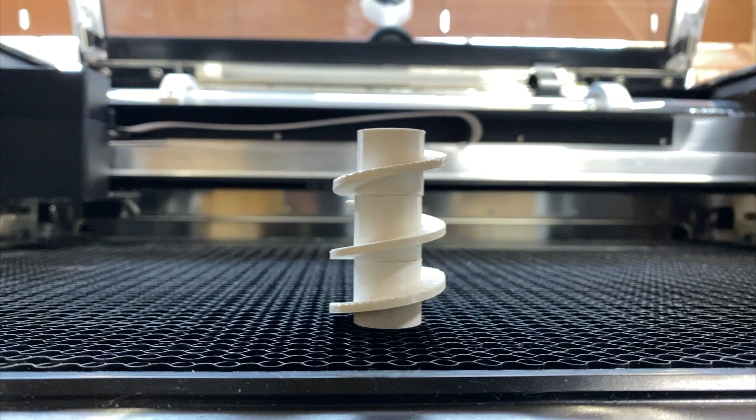If you own a Glowforge, you know two things. You know that it's one of the best tools you can have in your shop, and there's not a really handy way to hold small pieces of material down onto the crumb tray so that the air assist doesn't blow them around or they don't get jostled and the laser loses its focus.

Some people have developed some really good pins and other little tie-down mechanisms, but they all share a few similar faults. One, they don't hold material of any size. Two, they often break. And three, they don't hold them very tight. You can't really get a slight warp out of a piece of 1/8 inch birch.

So here are some of the things that I really want to make sure my new material holder does. First, it will need to work with materials of all sizes. That means all the way down to a piece of paper and all the way up to a 1/2 inch. And it should hold them firmly.

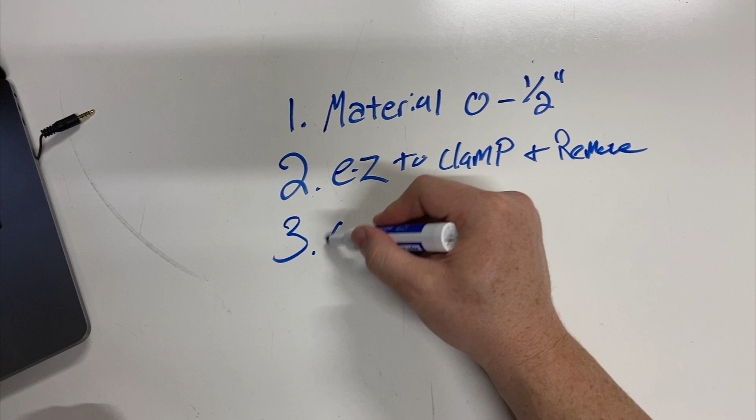It needs to clamp easily and be removed easily. Some of the T-pins don't really come out as easy as they go in, and it needs to be very easy to pull off as well as to clamp down. It can't get in the way of the cut, so it should have a really minimal holding profile. It shouldn't really extend onto the workpiece very much. It should just stay right at the edge and hold it down tightly.

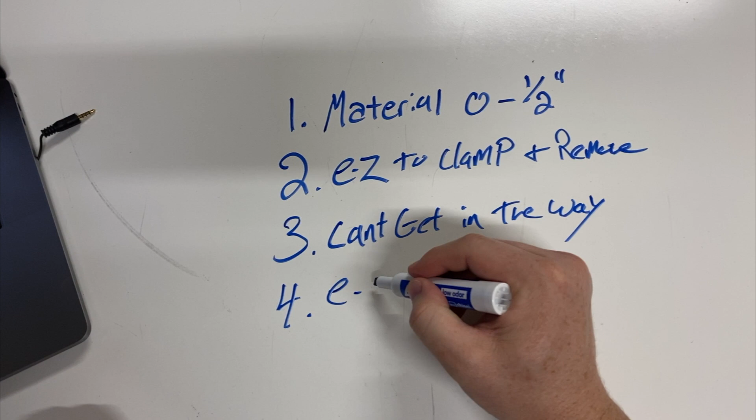And it should store easily right by my Glowforge. I don't want to be looking for it. I need it to be easy to reach and to apply to the workpiece. So with those few things in mind, let's jump to the computer.

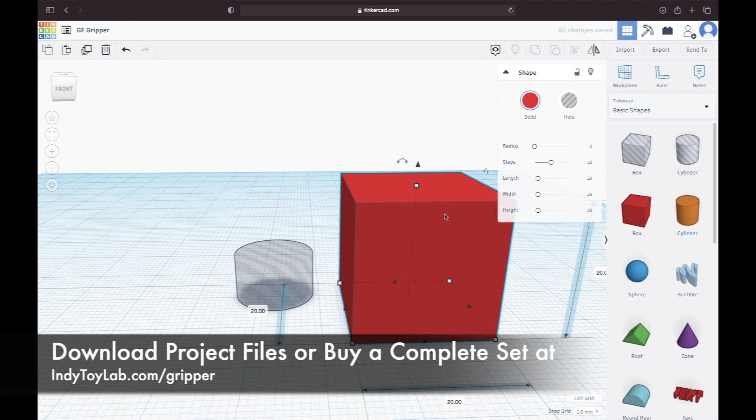Let's start with what we know. And we know that we want this to be magnetic. So let's get the size of our magnet in there. Let's start with something kind of square, a little bit bigger. We want to cut out different material sizes from each one of the faces, from 1/8 up to a 1/2 inch.

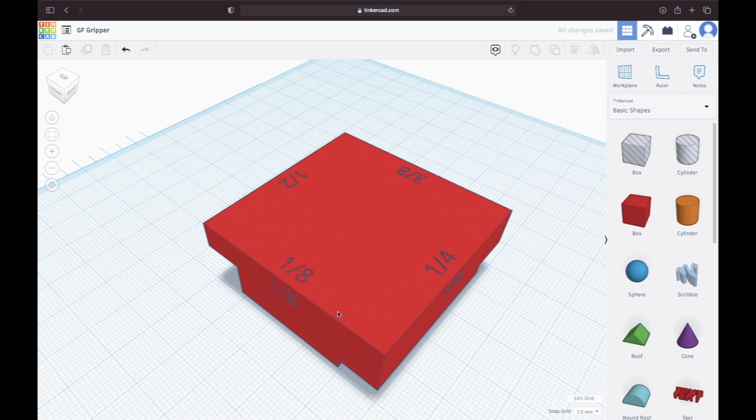Now you can start to see the profile. So we can put 1/8 under there, all the way up to a 1/2 inch over there. Let's add some labels really quickly. Also underneath, you'll notice our hole for our magnet. So now we've got that ready to go. Let's go ahead and throw this on the 3D printer and see how it works.

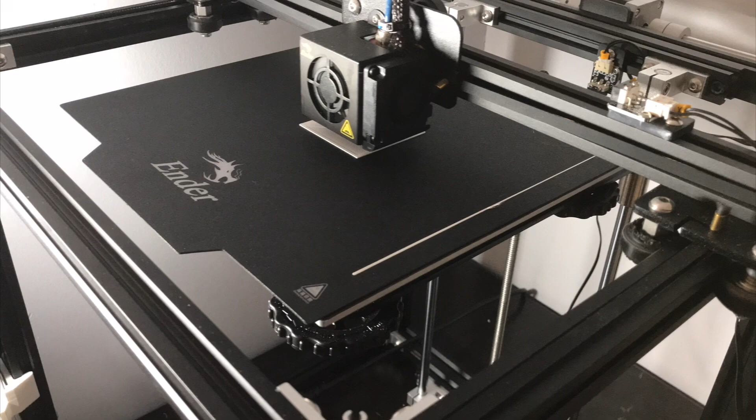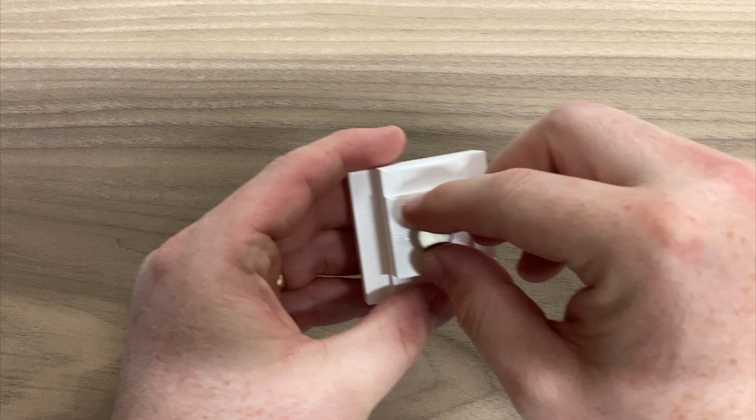Our finished print, and we're going to load the magnet. Now the magnets I'm using are these neodymium magnets, so stinking strong. Okay, there's a lot going on here. That's our magnet, and we will just seat our magnet down in there. We're going to let the epoxy dry and give it a test.

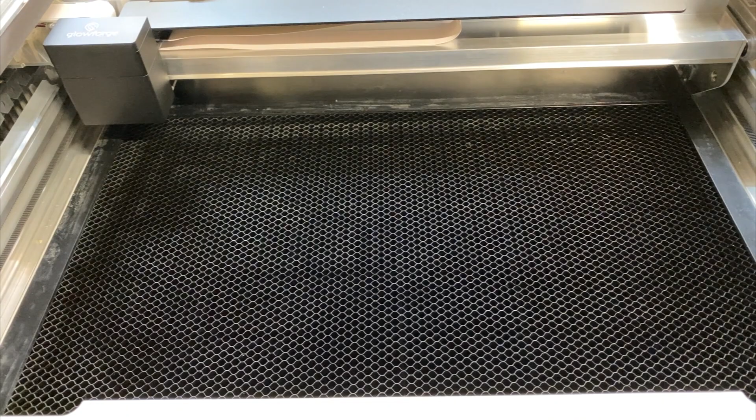So over to the Glowforge, where we've got a small piece of material we want to hold down. This is pretty consistent with the material I have the most trouble with because it's small, it's light, 1/8 inch white birch, and it tends to flutter a bit as the fan kicks on.

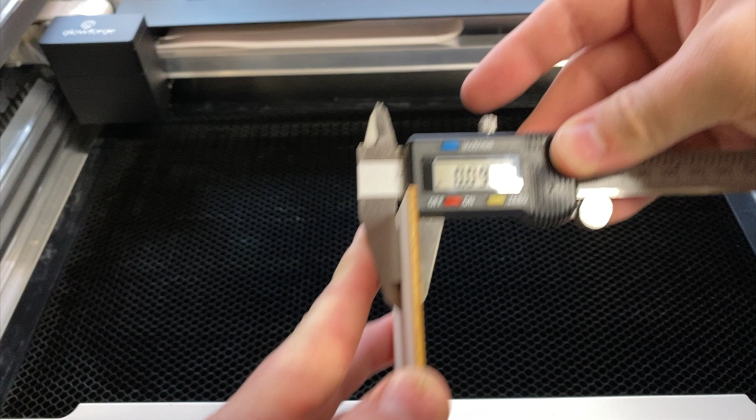One thing I noticed when I was getting ready is that this is probably going to be a problem we need to address in our next prototype, but you can see it's not 1/8 of an inch. But here we are with our 1/8 inch side loaded up. Let's go ahead and try it—you can see the magnet works really well, that's great. I can already tell you, it's just not a really positive grip. I can slide it in and out. I mean, I get some friction, right?

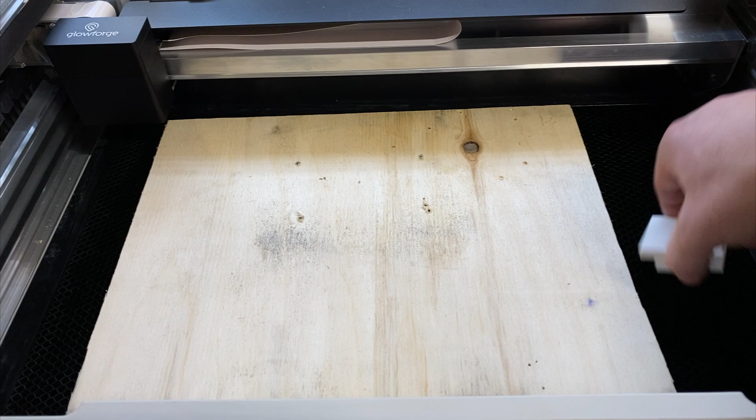But it's not what I want to do. Let me try something a little bit larger. I'm never going to cut on this, it's just scrap 1/2 inch ply. It looks pretty gross, but let's try to load up our 1/2 inch side there. Now that grabs okay, that's not bad. That's a true 1/2 inch, it was 0.49. But just generally, I feel like I wish I had more gradations. I wish I knew what I want to try. Okay, so we had a couple of problems with this one, so we'll just get rid of that.

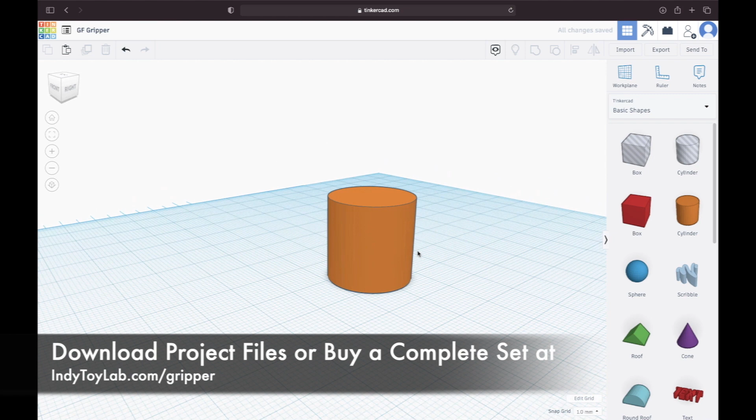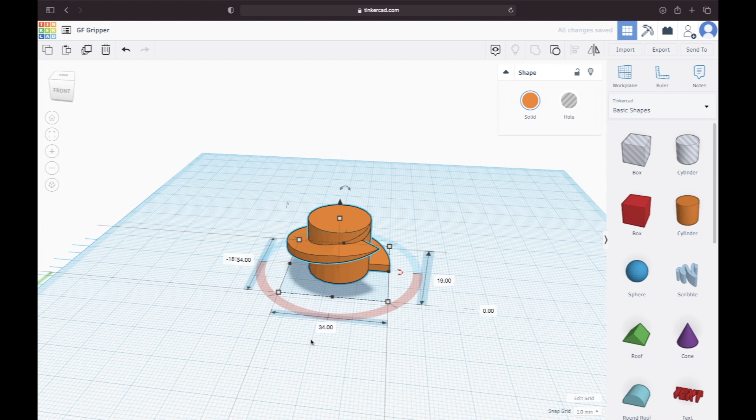And let's take our magnet, just throw on a cylinder. I'm wondering if I could take and wind something around the cylinder so it's continuously adjustable, so we don't run into that weird size material problem. The concept is you can put your material any size, from a piece of paper all the way up to a 1/2 inch, and just rotate it in place and snap lock that in with a little bit of pressure. I think this has a really good shot. Let's get it on the printer and see how it goes.

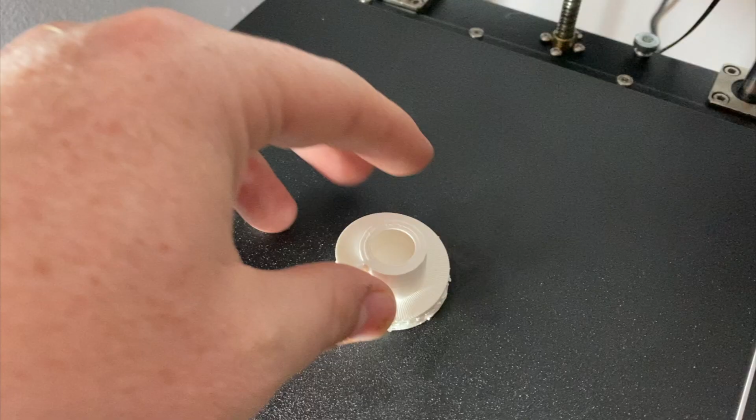I love this thing so much. I'm really excited to test it. Okay, back to install our magnet again. This is absolutely not a toy.

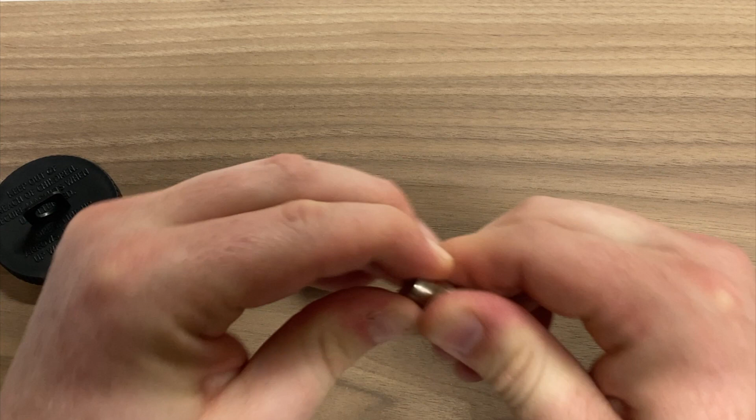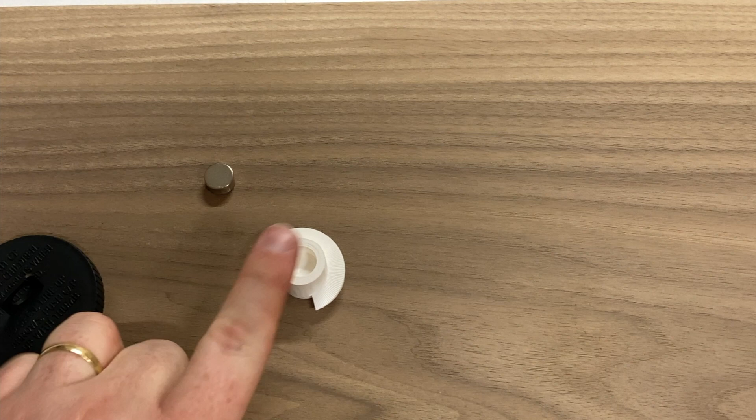Let me get these apart. I promise you I'm not faking this for the camera. How do you, seriously, how do you get these apart? Hold on, keep that far away from the other magnets. Come on, little buddy, nice. Down. All right, we're gonna leave that to dry.

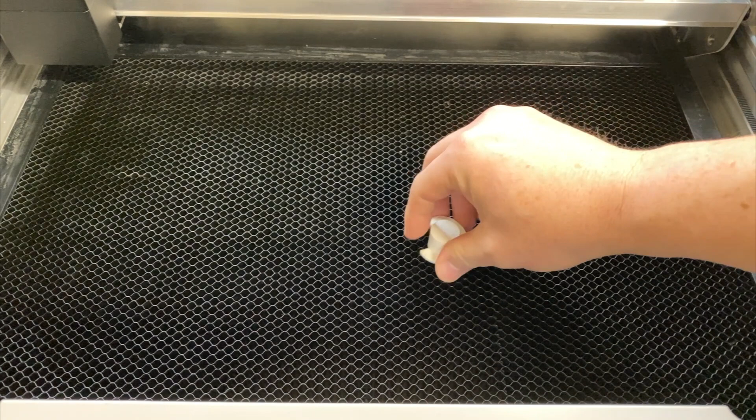We'll be right back. Back at the Glowforge to try our new prototype. So one of the things you'll notice is I put a bunch of these little V grooves on the bottom so that it kind of should ratchet into place, kind of twist and lock.

So let's try our same piece of white birch and just twist it. You can actually hear it kind of ratcheting in place. Let's see how it feels. Oh, that's really good.

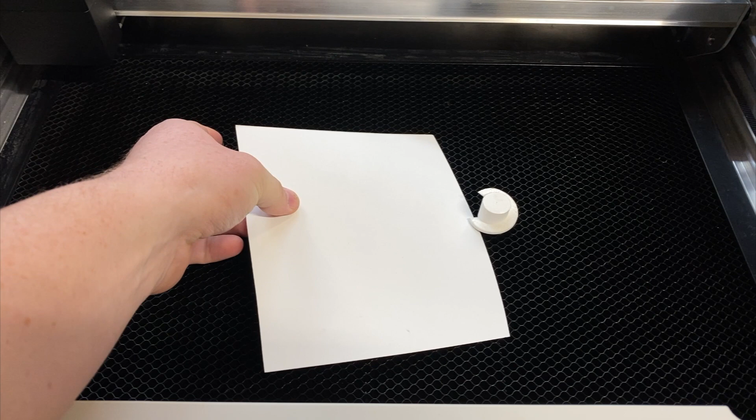Yeah, that's really good. What about a piece of paper? Just fit it all the way around on that one. Yeah, that's really good friction, actually. And honestly, you could just put it on the corner there too, and that's even better. So you got two options for paper. That's not bad. Let's try something a little thicker.

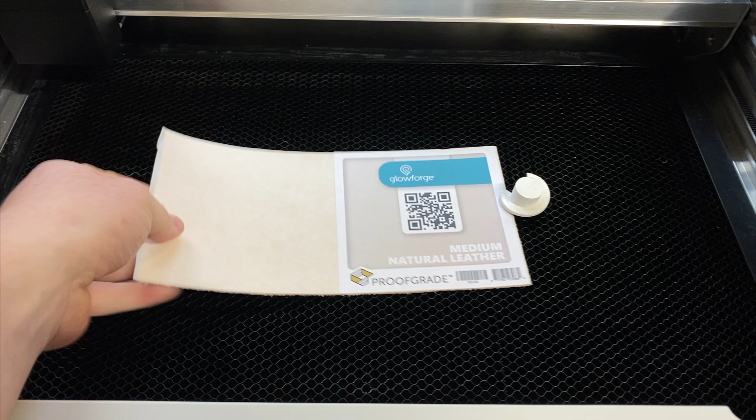Here is our nasty piece of 1/2-inch ply. Oh yeah, oh, that's a good grab. Oh yeah, that's great. What about leather? That's a good one, just kind of tighten it in there. Oh yeah, that's great, that's got a good grip.

You know what, you could also, the magnet is strong enough to grab right through the leather. I bet it would grab right through this. Oh yeah, hey, that's great. That's a good option to have. Okay, hey, this is really working. You can continuously adjust it to the size you want. Let's go make a few more and get some on either side.

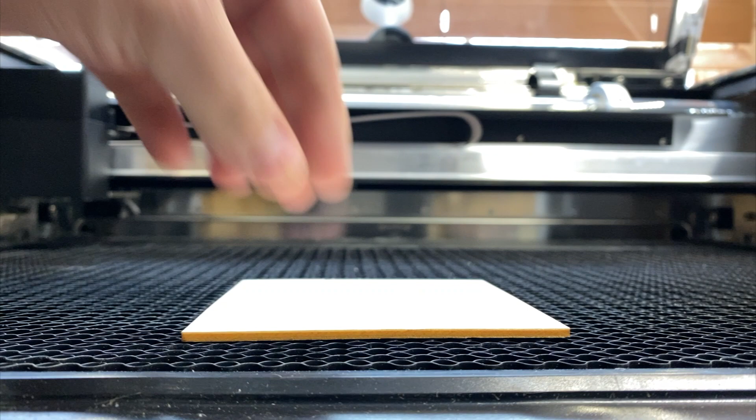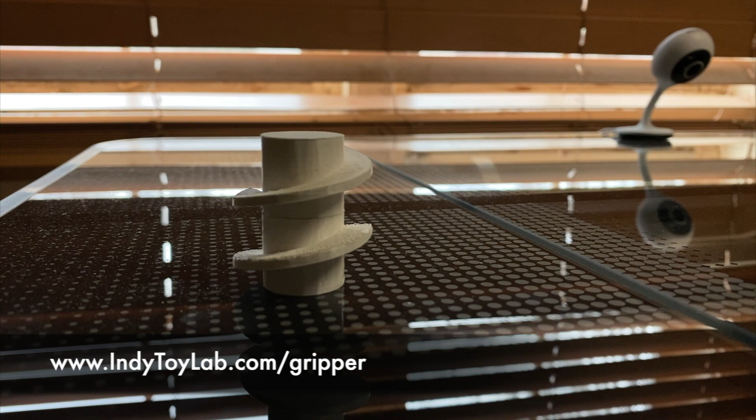I could not be more thrilled with how these turned out. They are super fun to use. They store so handily right on the Glowforge. They hold anything that the Glowforge can engrave on, and they hold it really firmly. So honestly, these are just perfect for what I wanted.